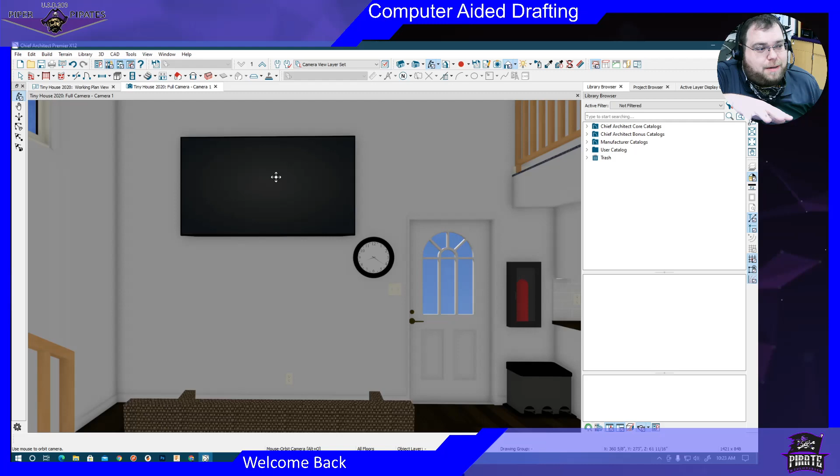So, probably, and this isn't a decision I'd really thought about before right now, I would build in my entertainment storage for game consoles, media computers, Blu-ray players, if you still have something like that, into a built-in underneath the stairs, and then have all those cable terminals from up here end down here. That way, it's in a convenient place.

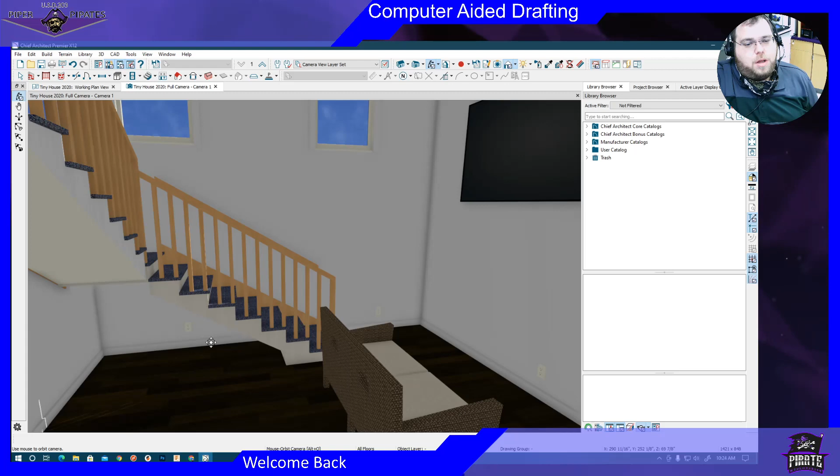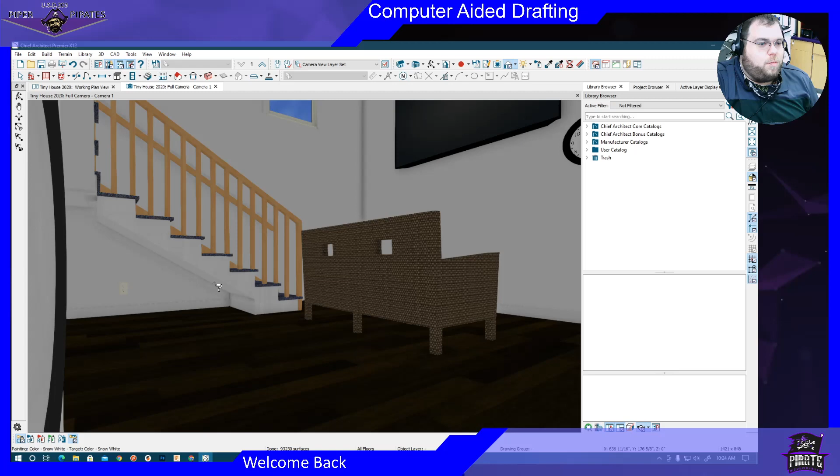With the way things are set up these days, and how thin TVs are, and where the technology has come from and is coming to nowadays, a lot of times you don't have to have everything in the same location. There are even tech enthusiasts I follow who have basically a closet in the basement where their entire house's entertainment equipment is stored, and everything else runs to various parts of the house through cable terminals.

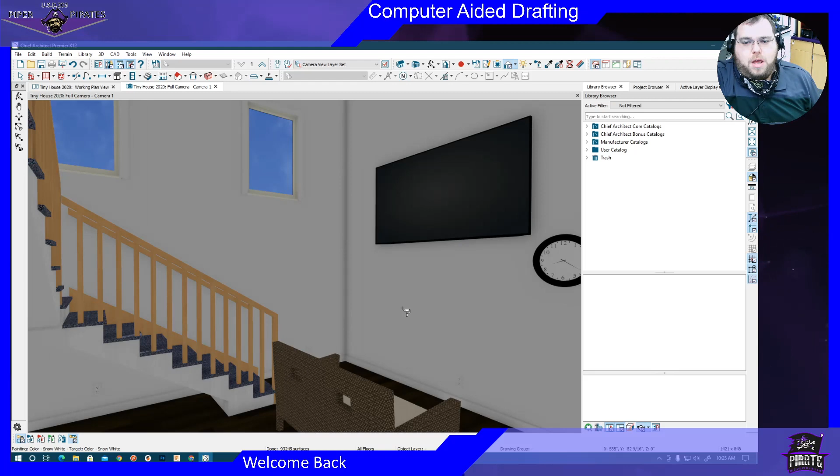That would be one of the best things about building a house right now - to build it for the spec of the type of life in which you live.

If you're a hardcore gamer, have that built into the table in front of you and connected to your TV, instead of having the console sitting in front of the TV itself. You could potentially, if you're one of those people completely flipped out about lag and latency, have wired cables running to the box that can't be tripped over.

So it's all things you kind of have to think about, but they don't have to be the first thing you think about when you're designing the house itself. But it's definitely something you have to think about as you move forward.

This is way off the topic for electrical planning, though. I kind of got, as usual, far afield. But anyway, let's go back to here.

It'll also identify the number and type of circuits that are in place. So one thing that we didn't do is we would, in a house like this, add an electrical box, a panel.

In the past and in some older houses, you'll still find fuse boxes. Fuses are weird things. You can find them in a whole bunch of different shapes and sizes. The most common one for residential looks like the bottom of a light bulb with a button switch on top. You screw the fuse in place, and it prevents overload from continuing to pass current through the system in the event of a short circuit.

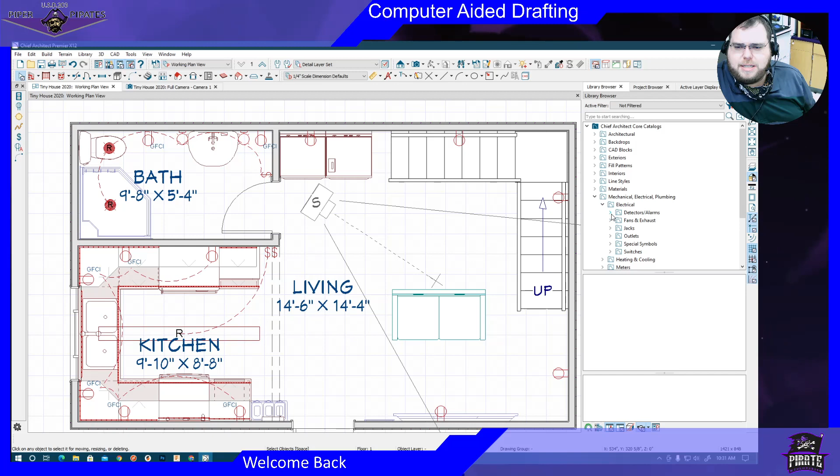Different switch options, special symbols. Ah, electrical panel, there it is. I'm just going to click on that, and I think in this particular place I'd put it on the wall next to the washer and dryer, just because that's essentially becoming my utility room over here underneath the stairs.

So then I would take my electrical switch and connect that to the panel. Same with the electrical outlets in the bathroom. For those, I would also include the light switch because you want the bathroom all on one setup. Maybe I would go ahead and do the kitchen light switches on that as well. We'll just connect that to the panel as well.

And the same for the living room and the same for the upstairs, except the upstairs we wouldn't actually connect it to the panel because of that same issue we had last time getting the lights upstairs connected to the switches downstairs. But that's basically the next step that we would have to do that we didn't add before.

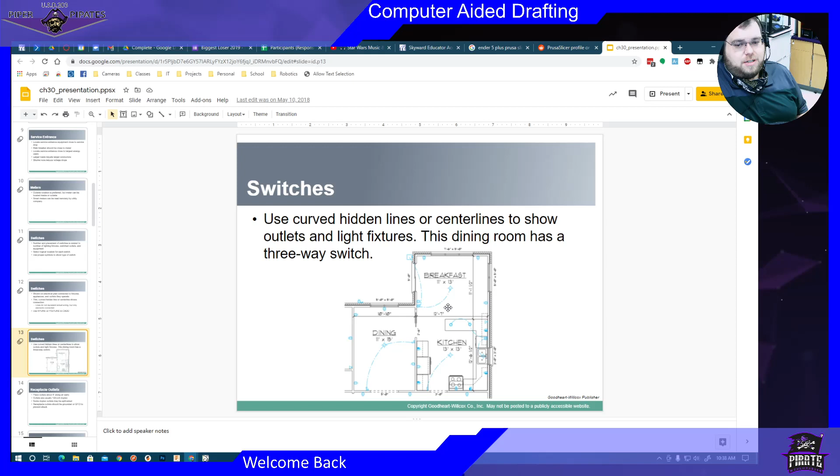This goes on to talk about energy efficient alternatives. Honestly, I don't think at this point you can even go buy tungsten light bulbs at Walmart or someplace like that - the ones that just have the coil that glows like an old Edison bulb. I think everything has to be CFL or LED or one of these alphabet soup of light types.

So these are kind of cool. Compact fluorescent bulbs are those curlicue ones. LEDs are light emitting diodes - they're essentially just the little bulbs that glow certain colors depending on what the settings are. I'm sure you've all seen those at some place or another.

Something you might not have seen before is called electrostimulated luminescence. It's kind of like neon, but much safer, flexible, cheaper, doesn't require glass tubes, and doesn't get hot. Neon, if you've ever come close to a neon light, is incredibly hot. But they're really cool.

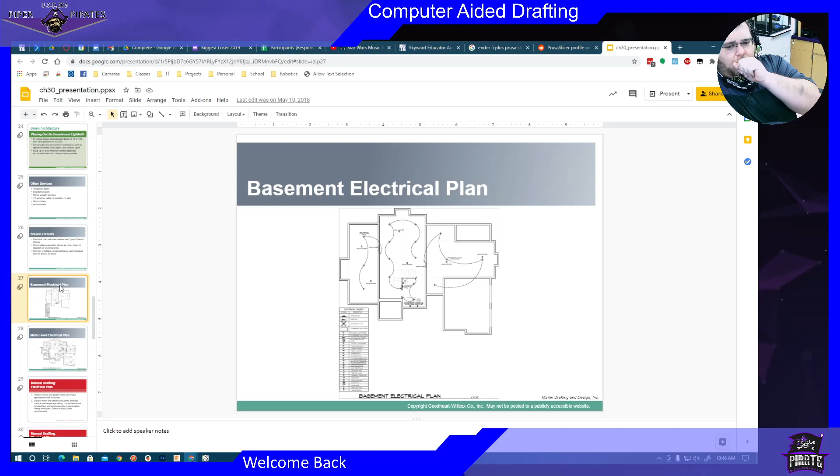As you can see here, this is why plans are a little bit different. They end up getting pretty complicated the more parts that get put on.

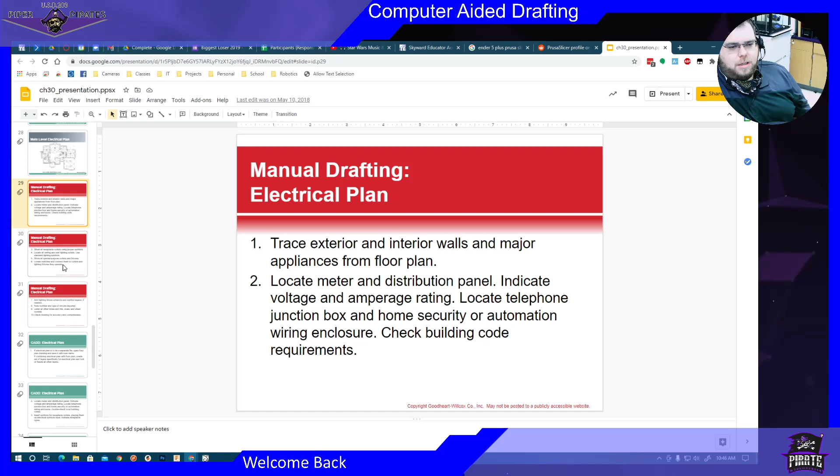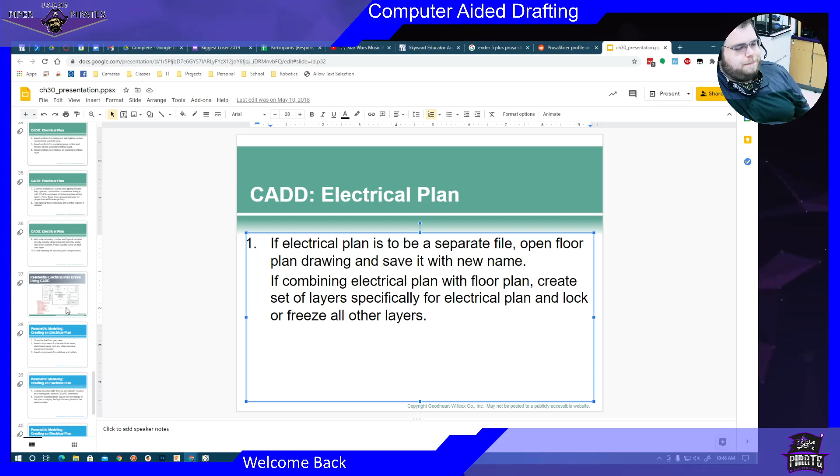This talks more about manual drafting, which we won't really do. If the electrical plan is to be a separate file, that's also something we don't really have to worry about with the way Chief Architect is set up. This would be if we were designing in something like AutoCAD, which is honestly how I originally learned how to do architecture. Just be glad I don't make you guys do that.

It's not as bad as manual drafting, but you still have to make many different layers or files, and if you make a change in one of them, you have to go through and change it in all of them. Chief Architect, since it's all one unified program, you make a change in one and it changes the electrical layer, the plumbing layer, the attic layer, the framing layer - all of these separate plans. A change made on the base floor plan changes all of them. So it's a major help.

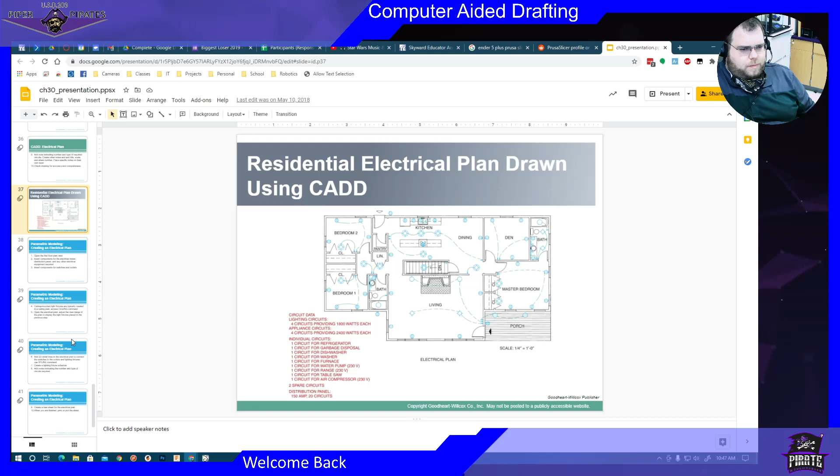So that was a really long-winded way of saying what I want you guys to do for today. You'll have the next 10 minutes or so, or however long you want, to work on it. But before the next time we meet, I want you to have finished putting your electrical outlets in.

You were supposed to have started thinking about what kind of lights and fixtures you wanted to add to the house you're working on. Go ahead and get those added in, then start placing things like telephone jacks - those are under the jack setting here. If you want to put cable in, make sure you put your cable jacks in.

Networking - if you aren't familiar, Cat 5 through 7 are different types of internet connecting carrying lines. I would just say use Cat 6, but any of those would be fine for a network connection setting.